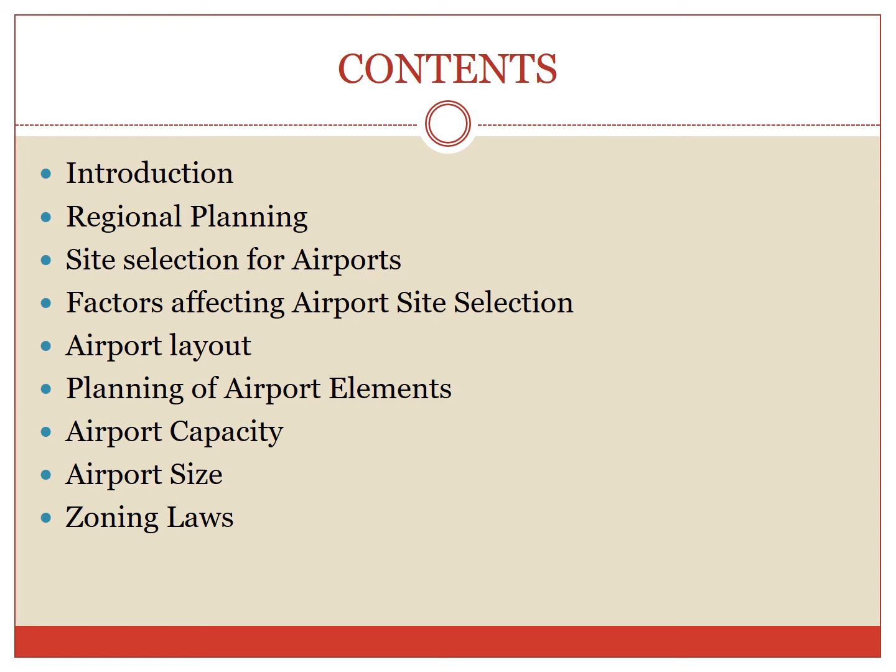So, what is airport planning? These can be divided into two categories: airport system planning and individual airport planning. Airport system planning deals with the interaction between airports as well as the planning of airports at a regional or national level. Such planning is required for national or state-wide funding schedules that support airport development and for ensuring a systematic approach to the allocation of funding among the many eligible airports. It also covers the management of multiple airports in a large metropolitan region.

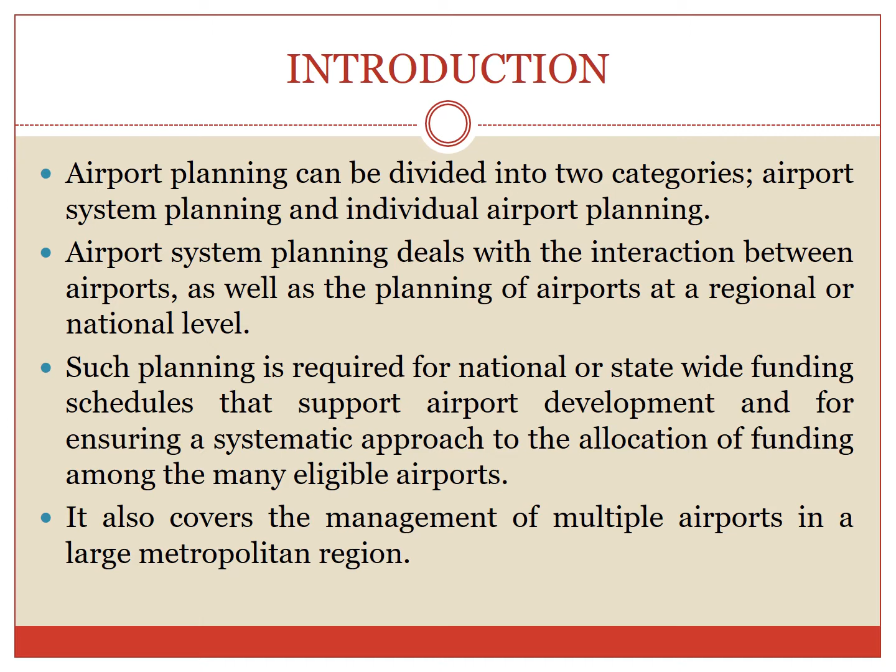As for the second category, comprehensive planning for the development of a specific airport is usually included in an airport master plan. Such a master plan is a list of comprehensive concepts for long-term development of an existing airport or construction of a new airport and presents the complete development concept utilizing graphical representation where appropriate, and the data and rationale upon which the plan is based. See in this figure, this is the whole site of an airport. This is to be planned before building up any airport.

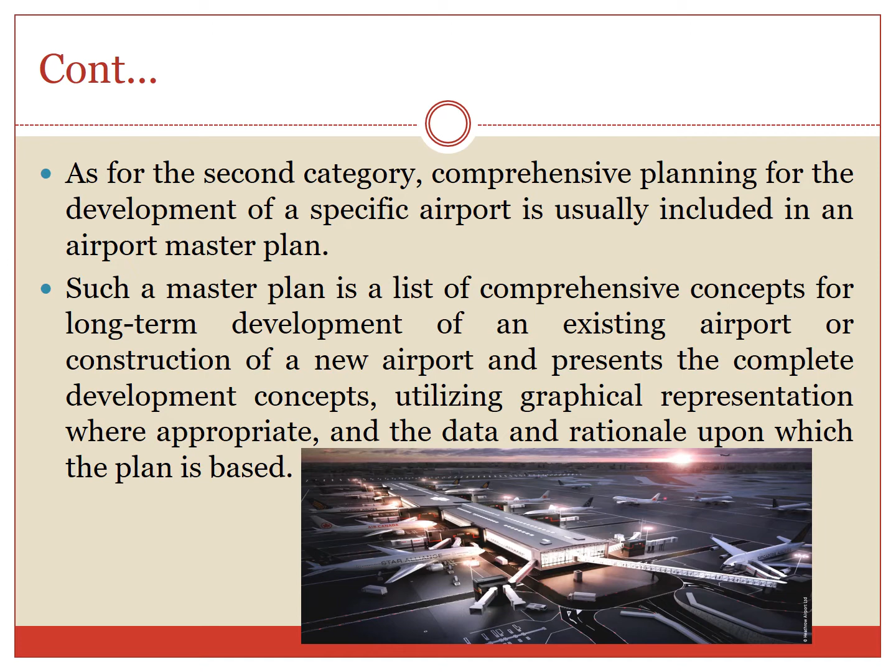Next, we have the regional planning. It is not only sufficient that we plan an airport. We also have to plan our region. So, an overall planning of an airport for all the regions of a country is called regional planning. The planning of an airport should be done considering the traffic needs of the nation as a whole rather than an individual locality. The regional planning of an airport system plan is a representation of the aviation facilities required to meet the immediate and the future transportation needs of the country and their timely and orderly development. These also recommend the general locations and characteristics of new airports and the nature of expansion for the existing airports.

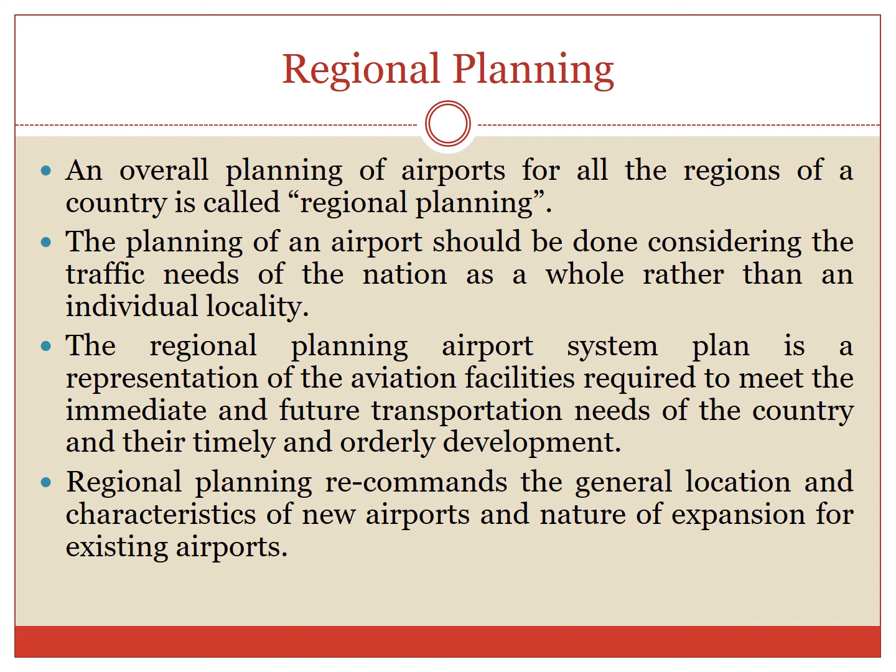Now, there are some of the objectives of regional planning. Firstly, to develop a balanced regional multimodal transportation system with coordinated airport facility. To provide a framework for individual airport development programs consistent with short, intermediate and long-term airport system requirements. These are the two basic objectives of regional planning. The third is to implement zoning laws in the area where new airports are needed in future. Now, why are these zoning laws very important? Zoning laws ensure that there is no commercial area inside where you bring up the outer airport.

Next, to optimize the use of land and airspace and preserve the existing airport facilities which are consistent with overall objectives of long-term planning. This planning is not meant for a short period of time. It has to be meant for a long period of time with all the existing features that will require expansion in the future. Next, it is to develop fiscal plans and to establish appropriate priorities for airport financing in short and long-term government budgeting. Now, some of the airports are private airports. Some may be via the public sector. So in this, the fiscal plan is very much necessary for government budget finance.

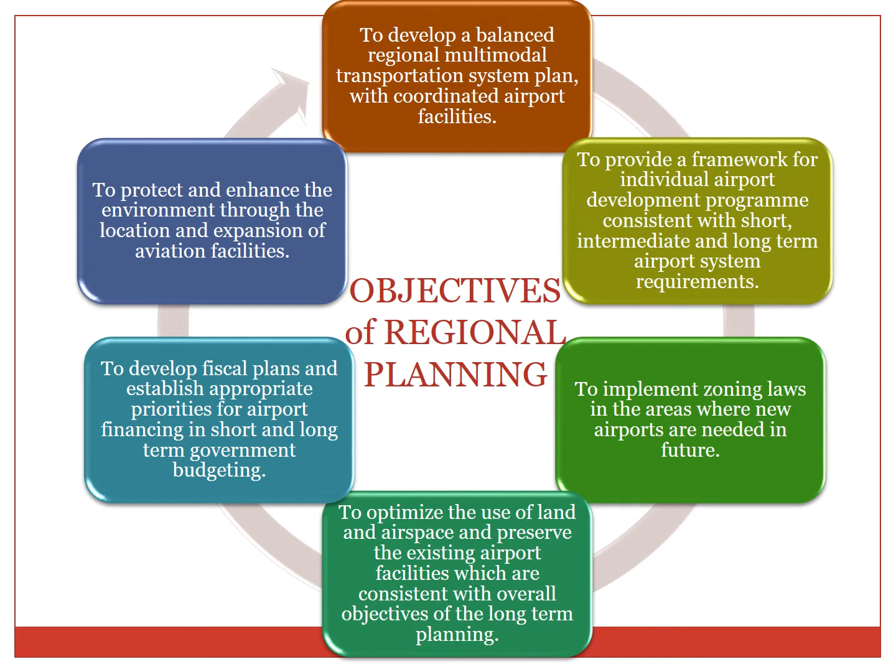Next, we move across to the advantages of regional planning. Now, it enables to implement the zoning laws in the areas where new airports are coming. There is proper coordination of airports, for which the efficiency of the airport in handling the air traffic is greatly increased. It avoids close spacing of the airports, which helps in preservation of the environment. Intrusion of unacceptable noise levels and air pollution into the community is also avoided.

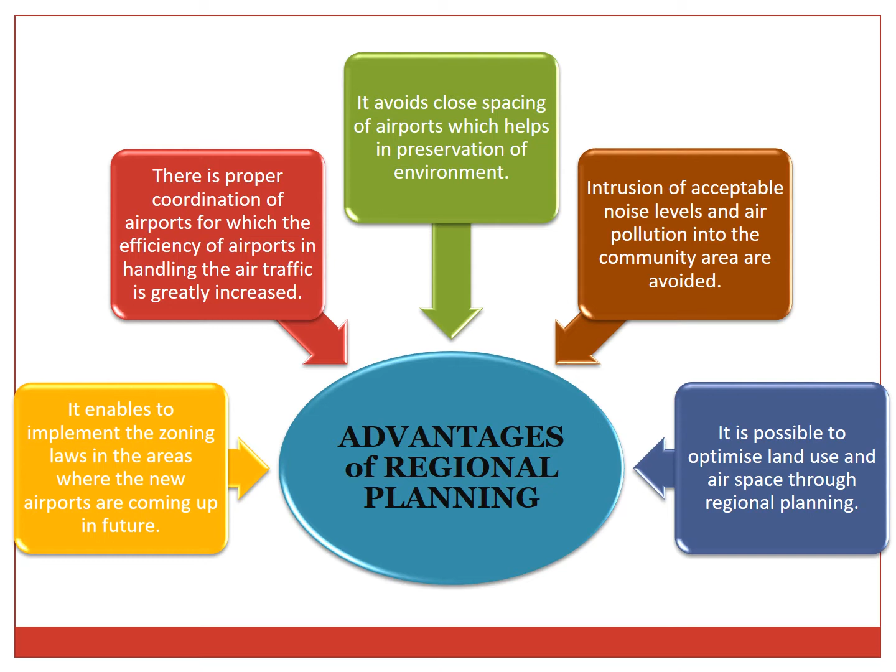It is possible to optimize land use and airspace through regional planning. Now, it is very much necessary to have a specific site selection for the airports. So, the site selection process consists of two parts. First, the data required before site selection, and second, the steps taken in the site selection.

Now, what are the data required for site selection? Firstly, the peak hour volumes of passengers and cargo at present and in future. The type of aircraft that will use the airport. The type of airport, its size and shape, facilities that are to be provided for passengers, baggage and cargo. The type of operation controls used.

Now the second is the steps in the site selection. Now what are the steps? Firstly, the requirement of land area. It has to be very large. Evaluation of factors affecting airport locations, meaning there are to be no high-rise buildings in front or in the nearby vicinity of an airport. Next, the preliminary office study of possible sites. Now, it is the very basic necessary step to be taken for site selection. Next, if selected, the site inspection and its environmental study.

Next is the review of potential sites. Now it is not considered that every site will pass. So we have to review the potential sites. Preparation of outline plans to build up an airport. Hence, estimation and costing of the revenues and the airport facilities for the future. Lastly is the final evaluation and selection of site and the reports and recommendations of the expert committees.

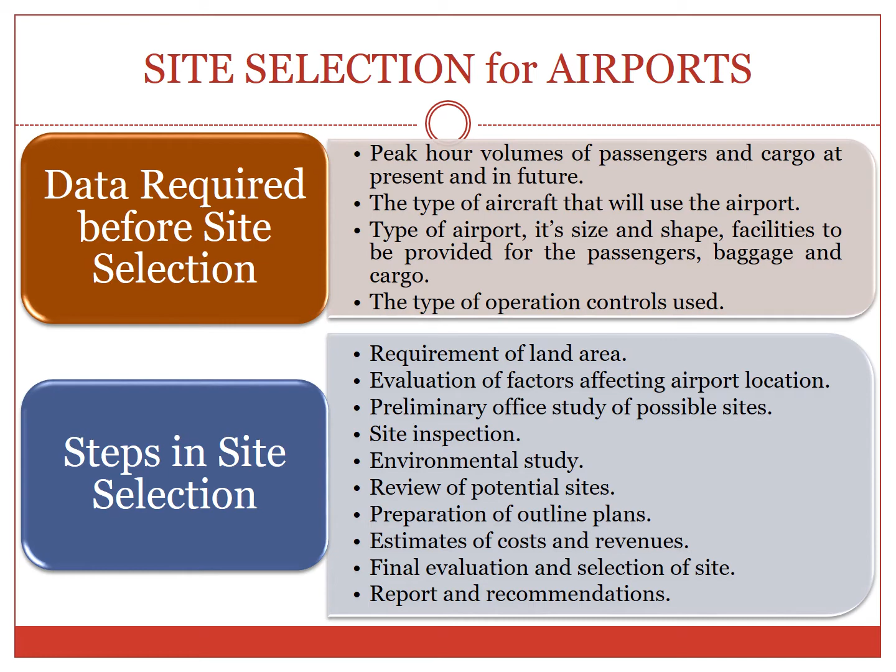Many other factors affect the airport site selection, such as the regional plan. Now what do you mean by a regional plan? The site selected for the airport should fit well into the regional plan, thereby forming an integral part of the national network of airports. Next is the airport use. The selection of the site depends upon the use of an airport, that is either civilian operation or military operation. Hence, during emergency, civilian airports are taken over by the defense.

Next, we move across to the presence of other airports. Now, interference between two airports in close proximity should be avoided. The distance between the airports will depend upon the circling radius and the operational control used. Next is the topography factor. Now, topographical features include ground contours, trees, streams, etc. These features affect the requirement for clearing, filling, and grading of that site.

Next will be the ground accessibility. Now, fast and efficient access facility for passengers and cargo is very much essential for an airport to provide efficient service. The airline passenger is more concerned with his door-to-door time rather than the actual travel time. So ground accessibility is the most basic essential factor affecting the site selection.

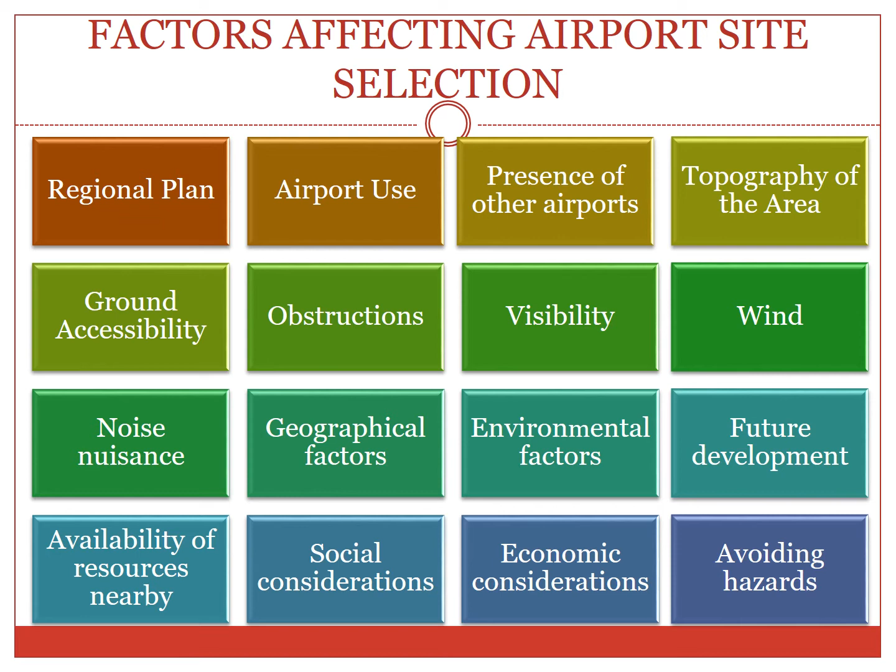Airport layout. Now what is an airport layout? It is a graphical representation to scale of existing and proposed airport facilities, their location on the airport and the pertinent clearance and dimensional information. It gives the configurations of the runway, taxiway, aprons, and should set aside area for the terminal facility. These are known as the airport layouts.

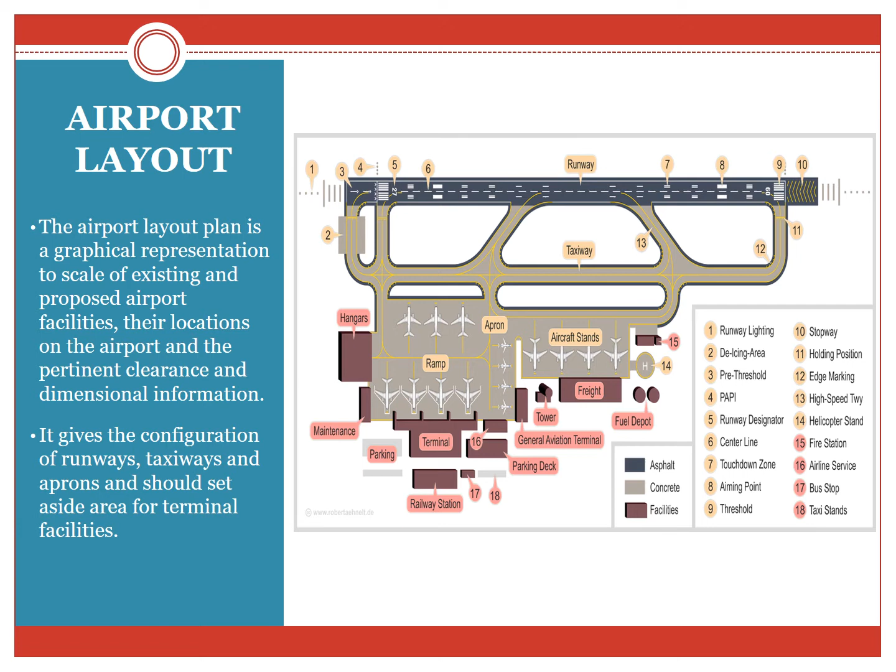Now in this figure you may be able to see all the basic layout components of an airport: the parking, the terminal area, the general aviation terminal, the control tower, the freight, the fuel depot, the aircraft stands, the apron, the ramp, the hangars, taxiways, the runways, and all other facilities that are provided in the land making up an airport.

Now there are many elements of an airport. Now what are these elements? These are the runway, stopways and the clearways, the approach zone and its obstructions, the land use around the airport, the land use around the heliport, the taxiways, aprons, terminal area and the passenger and baggage travel area.

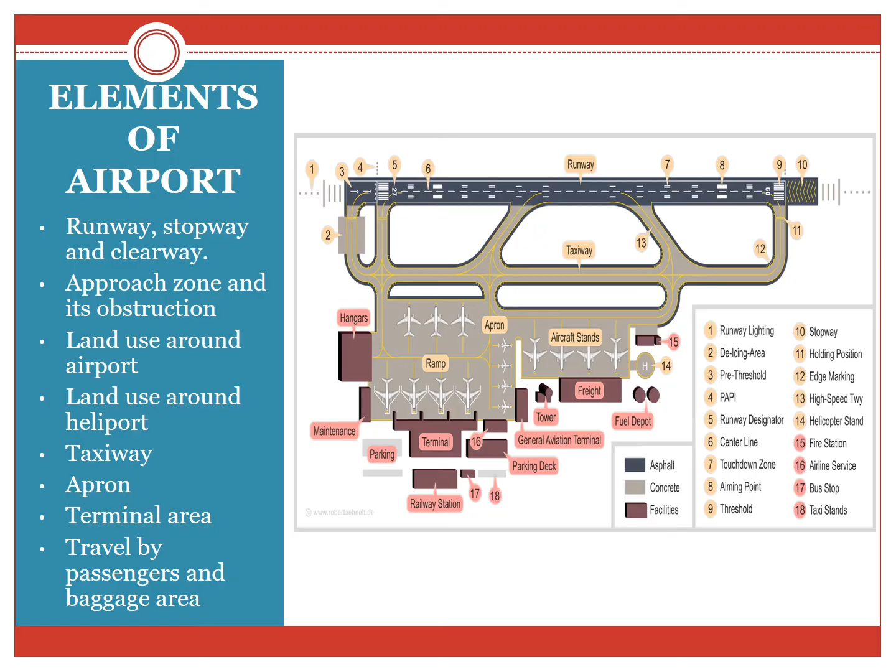So what are runway, stopway and clearway? The three things define each other in different terms. A cement concrete landing strip prepared for landing and takeoff operations of an aircraft is known as a runway. Whereas a stopway may be defined as a paved area provided at the end of a runway whose width is equal to the runway and is centrally located along the extended center line of a runway.

Clearway: it is provided as a precautionary measure against engine failure. It may be defined as an area beyond the end of a runway, centrally located along the extended center line of the runway, not less than 150 meters in width.

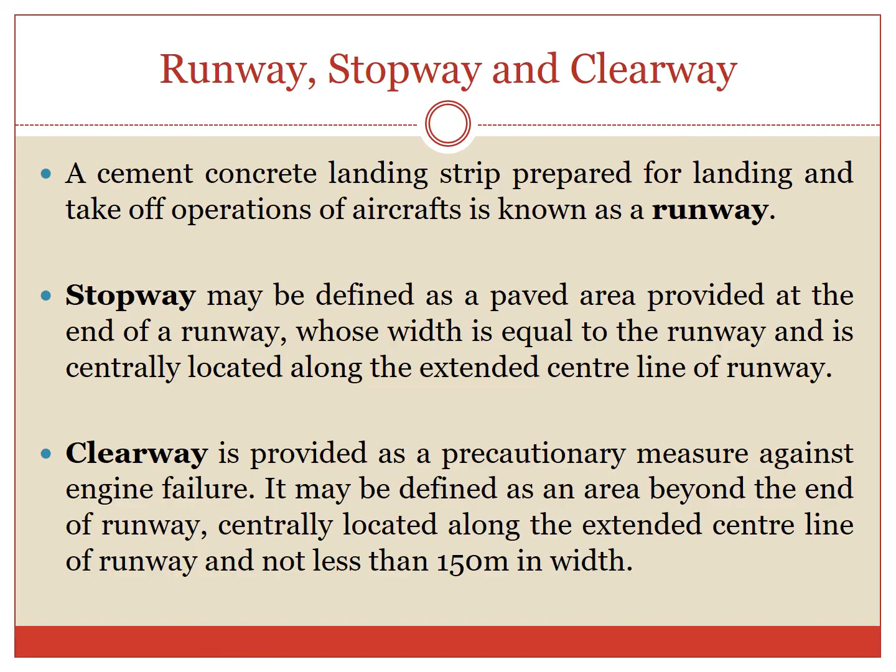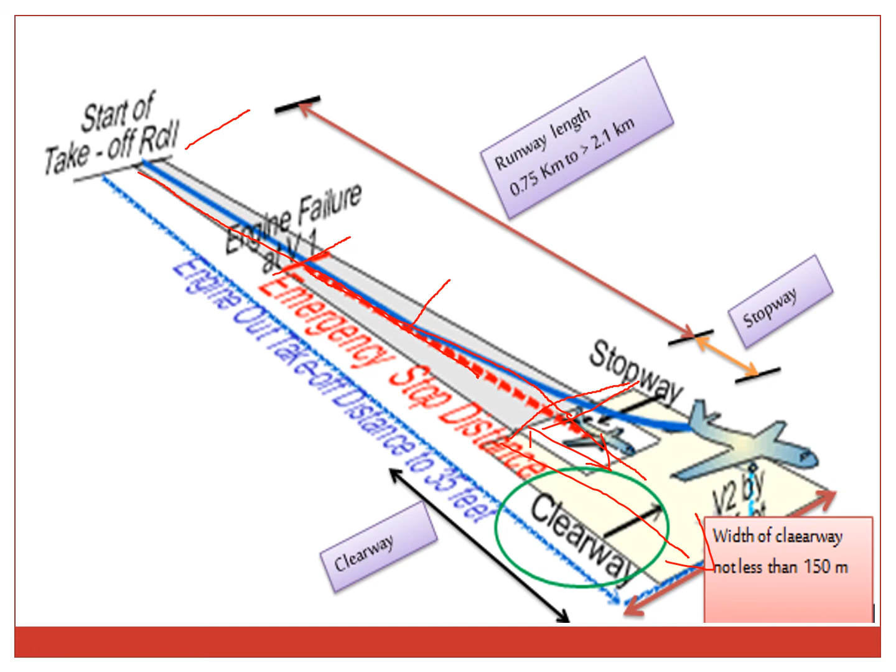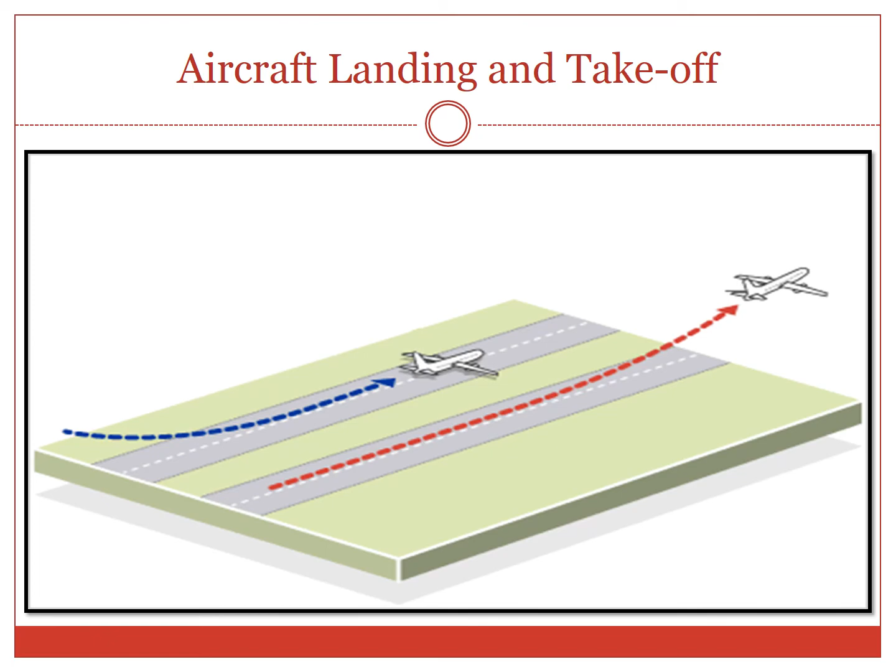Now this is the takeoff distance figure. Always we have a 15% margin from which the airplane has to take off. After this 15% margin is my stopway.

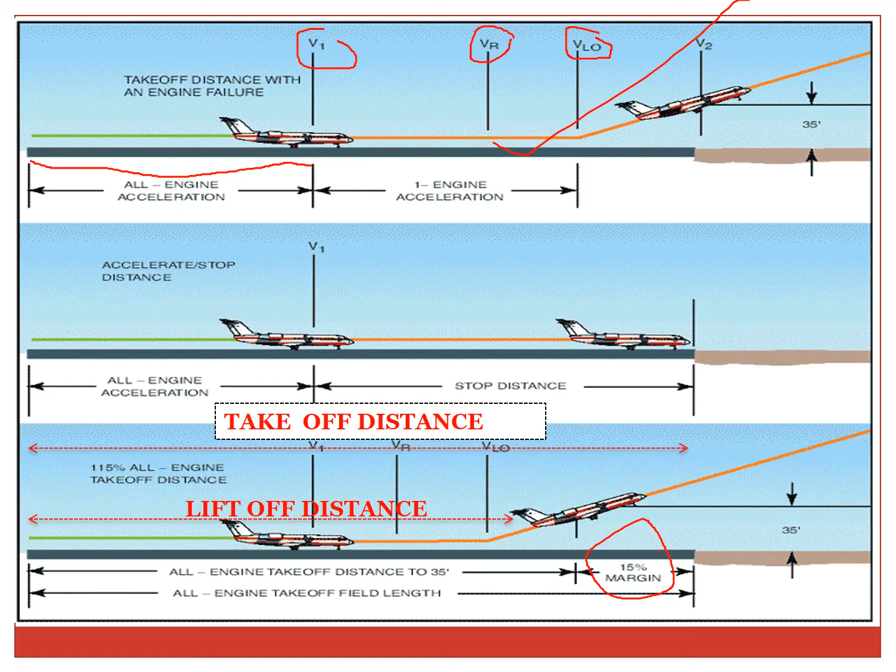Terminal building, also known as the airport terminal. These buildings are the spaces where passengers board or alight from flights. These buildings house the necessary facilities for passengers to check in their luggage, clear customs and have lounges to wait before embarking. The terminal has cafes, lounges, bars to serve as waiting areas for passengers.

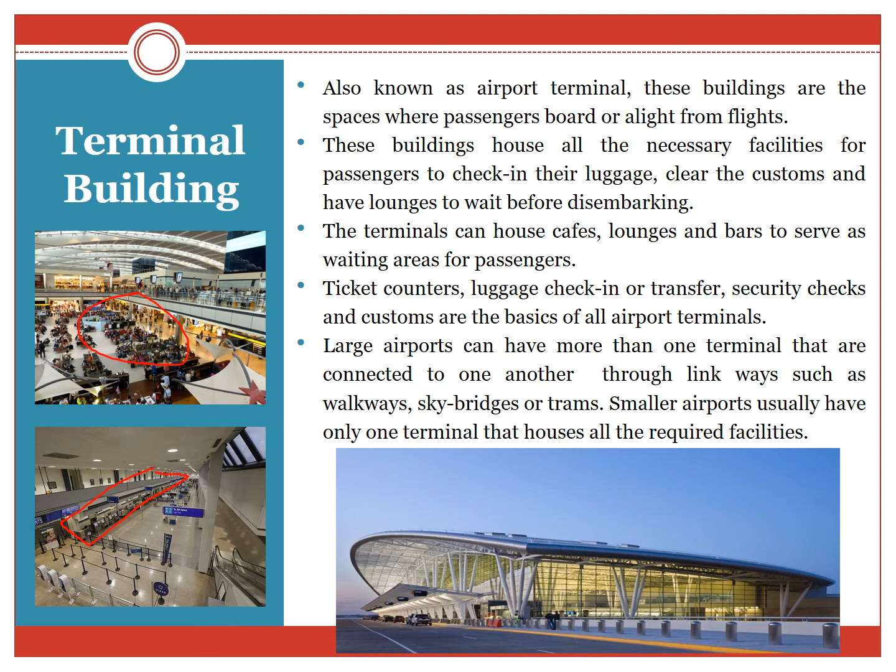Ticket counters, luggage check-in or transfer, security checks and customs are the basics of all airport terminals. Large airports can have more than one terminal, connected to one another through link ways such as walkways, sky bridges or trams. Smaller airports usually have only one terminal that houses all the required facilities. These figures show you the waiting area, the ticket counters and the custom checks, and this in total will be the terminal building.

Next, we move across to the aprons. Now, as I have pointed in the figure, this is known as an apron. Now, what are aprons? These are areas where the aircraft park. Aprons are also sometimes called ramps. They vary in size from areas that may hold 5 or 10 small planes to the very large areas that major airports have.

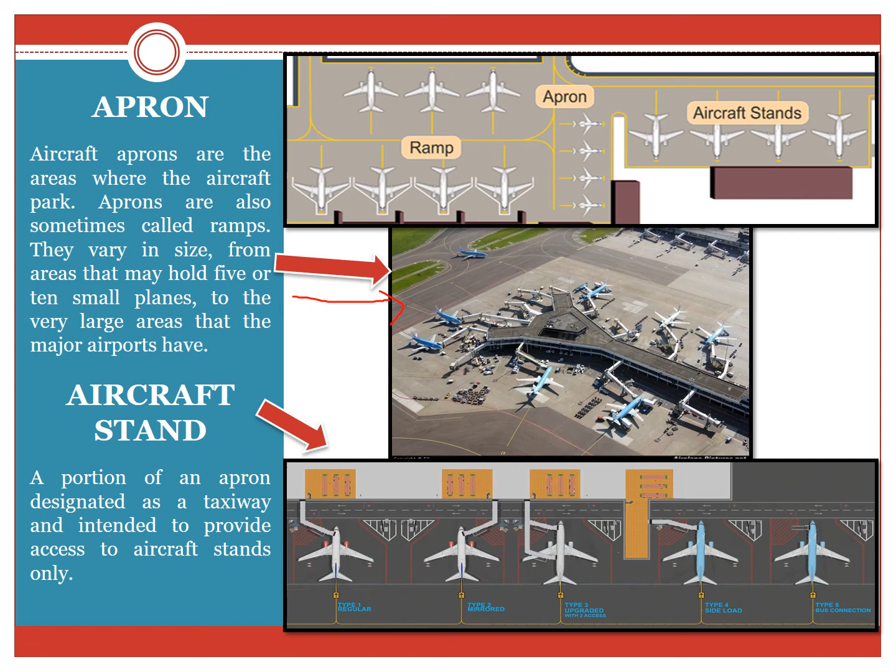Next, we come across the aircraft stand. Now, the aircraft stand taxilane is a portion of an apron designated as a taxiway and intended to provide access to the aircraft stands only.

Next are the taxiways. A taxiway is a path on an airport connecting runways with the ramp, hangars, terminals and other facilities. They mostly have hard surfaces such as asphalt or concrete, although smaller airports sometimes use gravel or grass. So this shows the taxiway. The red mark shows you the taxiway beside the runway.

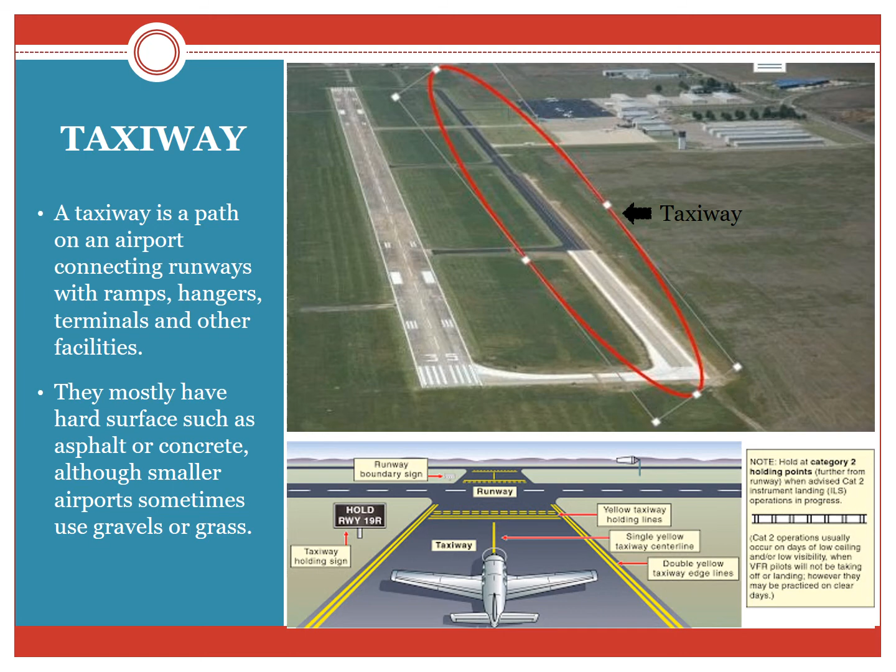The control tower, having the components of a control cab, the junction level, the tower shaft, and the base building. This as a whole is known as the control tower: a tower at an airfield from which the air traffic is controlled by radio, or observed physically and by radar.

Next facility is the airport parking facility. Now there may be a number of passengers and cargo coming into your airport. So the parking is a specific area of an airport at which the vehicles are to be parked.

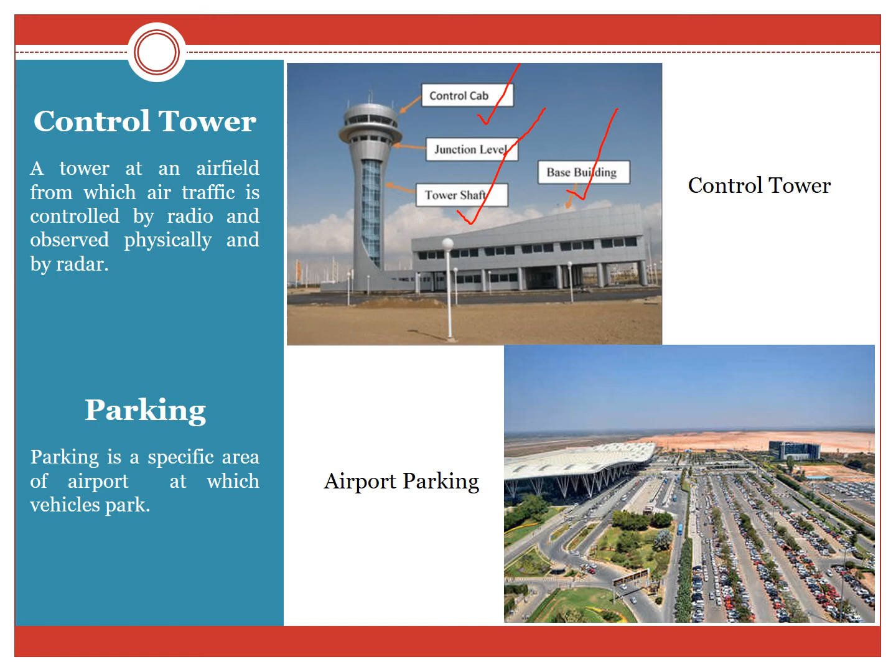Next is the airport capacity. Now how do we determine an airport capacity? So, the number of aircraft movements. I have underlined this. Why? Because a landing or takeoff operation is counted as one operation. So, the number of aircraft movements which an airport can process within a specified period of time, with an average delay to the departing aircraft within the acceptable time limit, is defined as the airport capacity.

Now, this may be affected by the following factors. Majorly, the runway configuration and connected taxiways, the aircraft characteristics, the permissible delay to departing aircraft, the ratio of arrivals and departures of the aircraft, landing operations given priority, weather conditions, terrain and man-made obstructions, experience of the controller, the navigational aids at night, and the terminal area facility. These are the factors that affect the airport capacity.

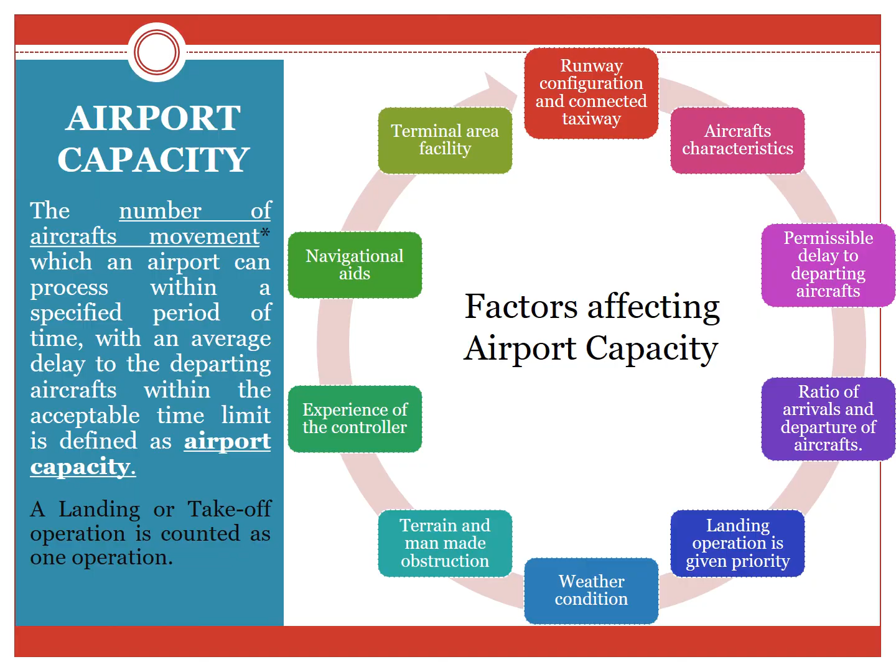Next, we come across airport size. Now, the airport size depends on four factors. The elevation of the airport site: higher elevation will lead to lesser density of air and greater runway length. Next is the volume of air traffic. The arrangement of the runways, taxiways and hangars is to be specified following the volume of air traffic. Next, we have to consider the meteorological conditions, in which wind velocity and temperature matter; higher temperature decreases the air density, requiring a longer runway. And lastly, the performance characteristics of an aircraft.

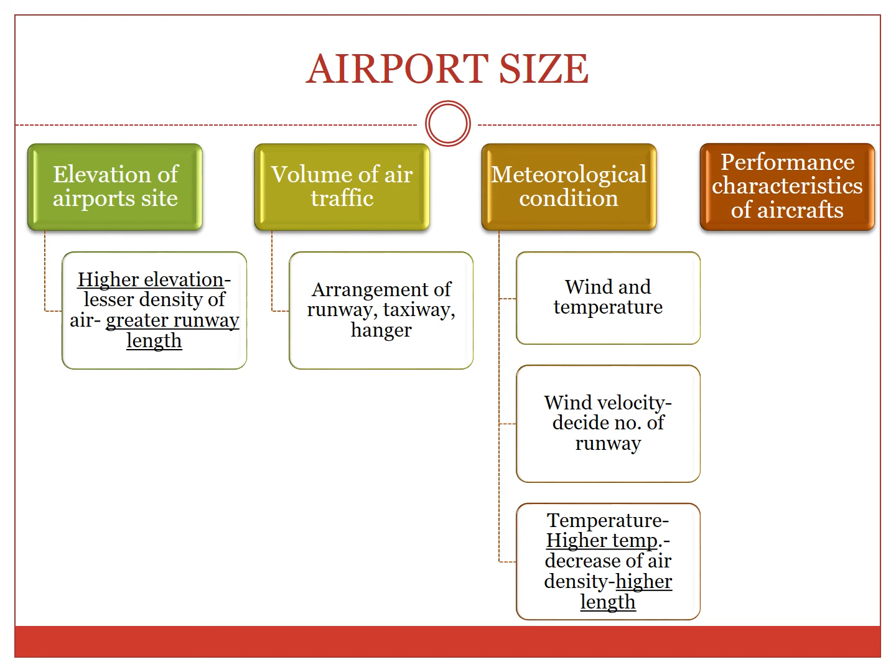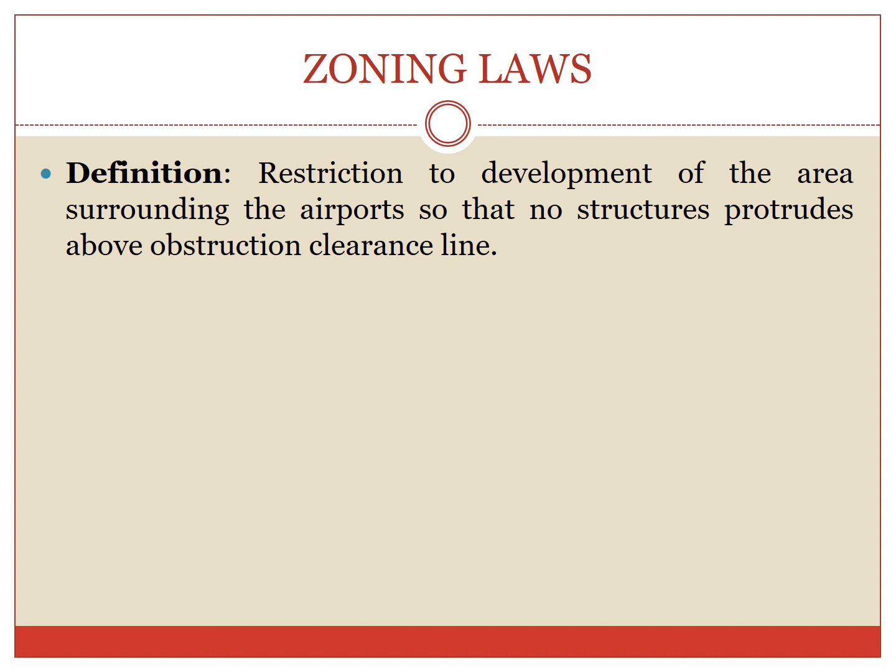Next are the zoning laws. Now, what are zoning laws? These are the restrictions on the development of the area surrounding the airport so that no structures protrude above the obstruction clearance line. Now, the zoning laws are divided into two: height zoning and land use zoning.

Now, what is height zoning? It limits objects exceeding their limiting heights above the ground surface. This is known as height zoning. It protects the approaches and permissible height in the nearby vicinity. Next is land use zoning, for objects protruding above certain imaginary surfaces. Land use zoning governs the type of development in the nearby vicinity where the airport is to be built in the future.

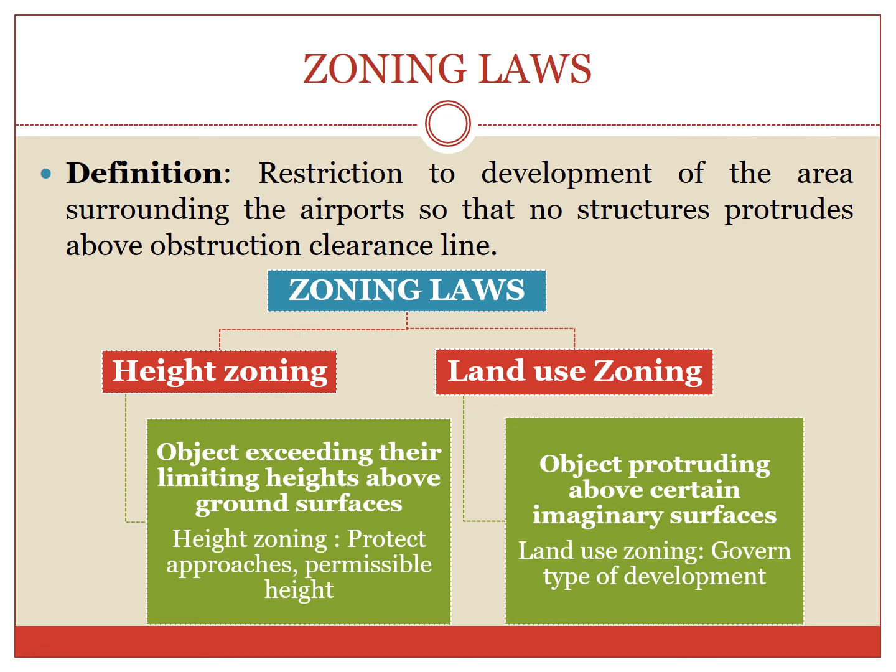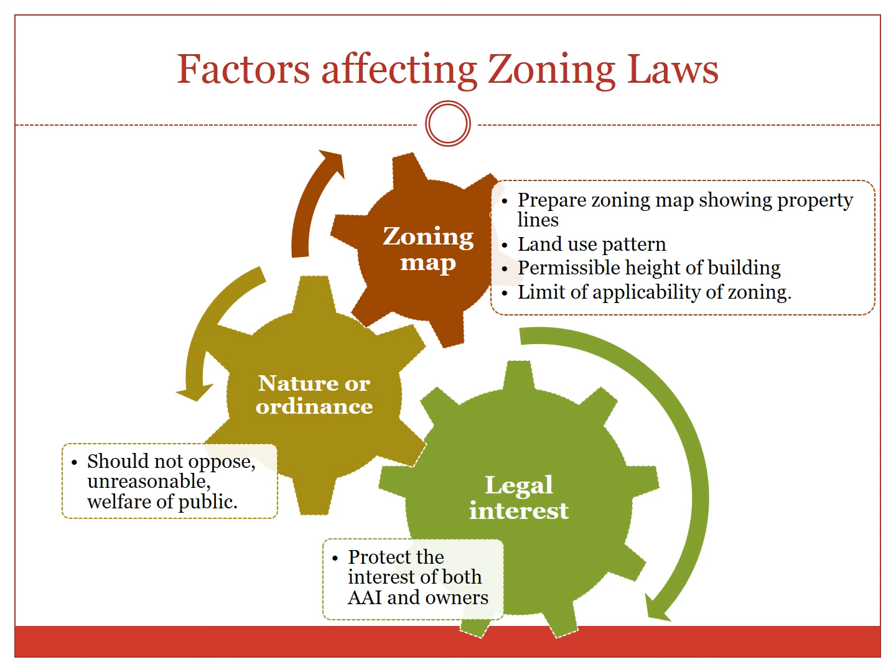The figure itself shows the hierarchy: the legal interests are considered the major priority, the nature of the ordinances is considered the medium priority, and last is the zoning map, to be considered while planning, among the factors affecting the zoning laws. So this comes to the conclusion of another topic known as airport planning. Hope all of you have found out the importance of it and have thoroughly gone through the PPT.